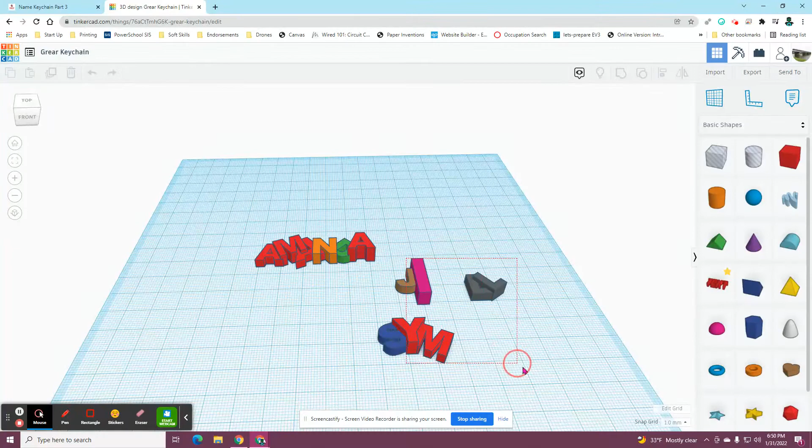Let's go make it. So we go back to our keychain. We're going to click Tinker This again. And I need to get rid of all of this. So this is all the extra from part 2. You don't need to see that anymore. So for part 3, here's my name. So I need my first cylinder. And according to this, it needs to be 8 millimeters square and 4 millimeters tall.

So 8 millimeters square. The easiest way, let me drag that all the way. The easiest way I find to do this is to click on the white box in the corner or the black dot, the black box. It's your choice. And then you go click on the number. And then, because it's highlighted in blue, I can just straight type. If I hit backspace, I might accidentally delete my cylinder, which is bad.

So I'll just type 8 and then hit enter. And then I'm going to go click this other 20, and I'm just going to type 8 and enter. So I really pressed 2 keys, 8 and enter, on both of them. And then it says 4 millimeters tall. So I'm going to go over here to my cylinder, and I want the height. So this is the Z-axis.

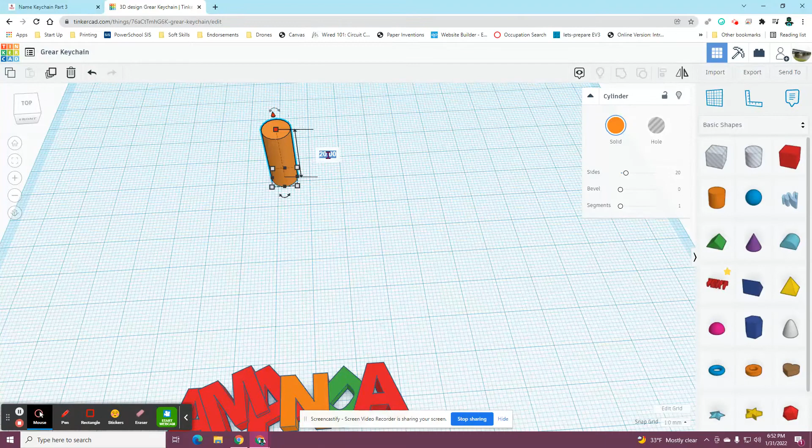And I'm going to click that white box at the top. And then over here on the 20, I clicked it once, so it's now blue. And then I'm going to hit 4, enter. So it is now 4 millimeters tall. So that's my first cylinder. The second cylinder I need to get is going to be 5 millimeters square and 6 millimeters tall.

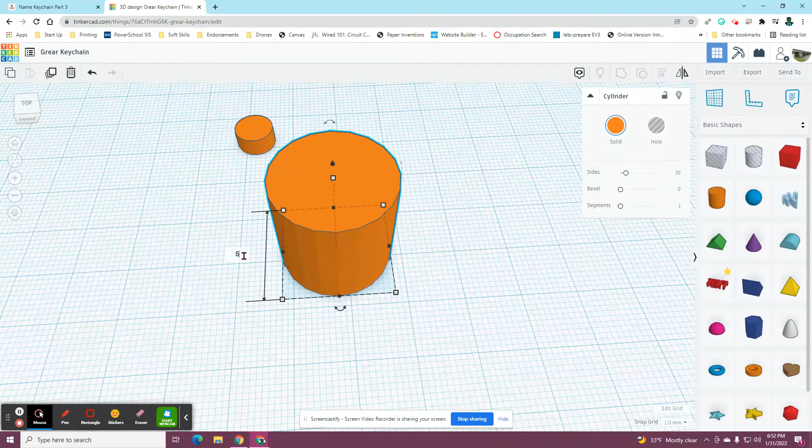So I'm going to go get another one. And this time, I forget already, 5 millimeters square. So I'm going to go ahead and click, this time I'll click on the black dots. So this one I need to be 5. So 5, enter. And then I'm going to go click on this one to get that number, 5. So they're the same. They have to be the same. If they're not the same, it's not going to be perfectly round. It'll be an oval.

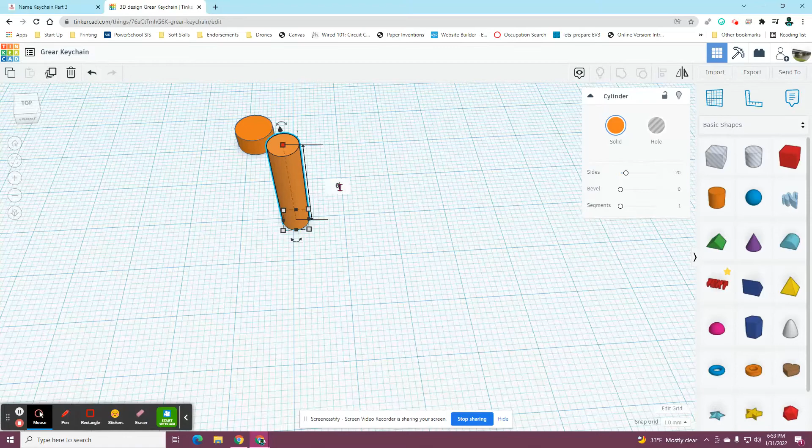And then the height is 6 millimeters tall. So I'm going to click up here, and this one needs to be 6. Okay? Now my directions say I need to make this one into a hole. So I'm going to go over here to this pop-down box, and I'm going to click hole. So it's now kind of see-through, transparent, but in Tinkercad world, this is a hole. That means this is negative space.

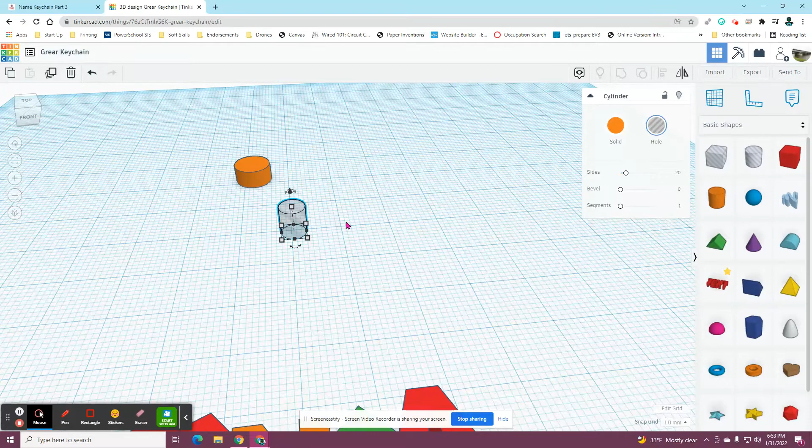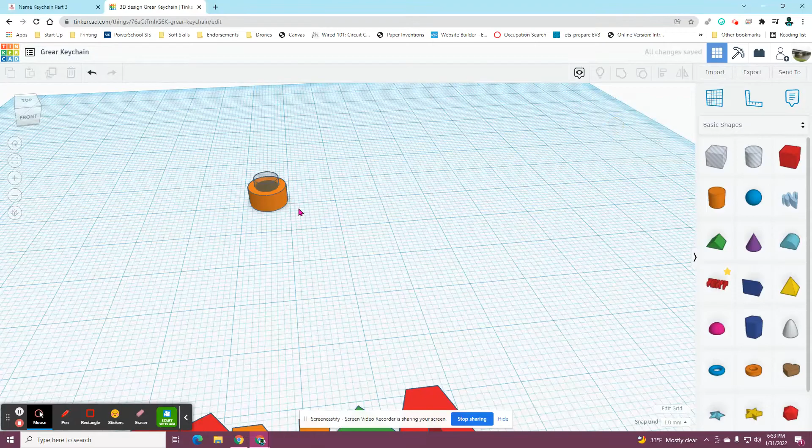So when I group this with something else, it's actually going to subtract away the solid material from the other object. So now I need to select both of these because I need to perfectly center that hole, that second cylinder, inside the first cylinder. So I'm going to click the Align tool, and I'm going to click the center dot here, the center dot there, and you need to make sure this dot here is selected so that it's not floating around. Let me show you.

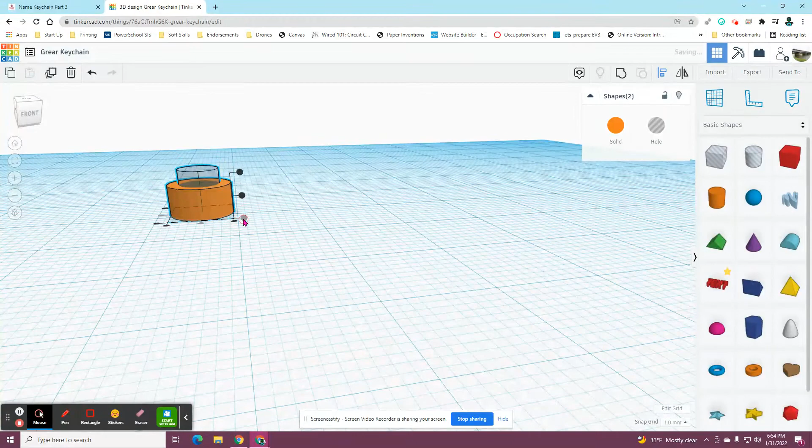If you have accidentally at some point in time clicked that cone, and you go to your Align, why are you doing that? Okay, you go to your Align tool, there we go. We want this dot here to be selected. So this dot should be grayed out, this middle dot should be grayed out, and this middle dot should be grayed out. And with this selected, then you're going right over here to group, and I know I can click group because it's activated versus that is not activated.

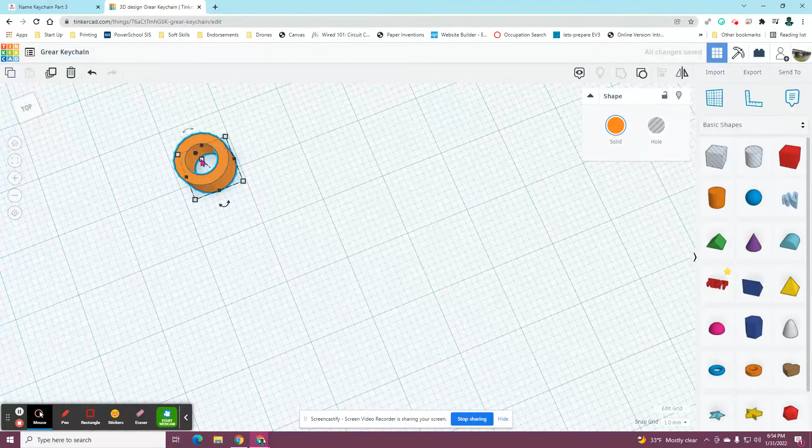So we're going to click group, and once I click group, the magic happens. It's so much fun to watch. It takes away that cylinder. That inner cylinder becomes a hole. And now if you rotate around, you can actually see through this. You should be able to see through this. Please rotate around and make sure you can see through this. And then you get to drag it down with your arrow keys and attach it ideally to your first letter.

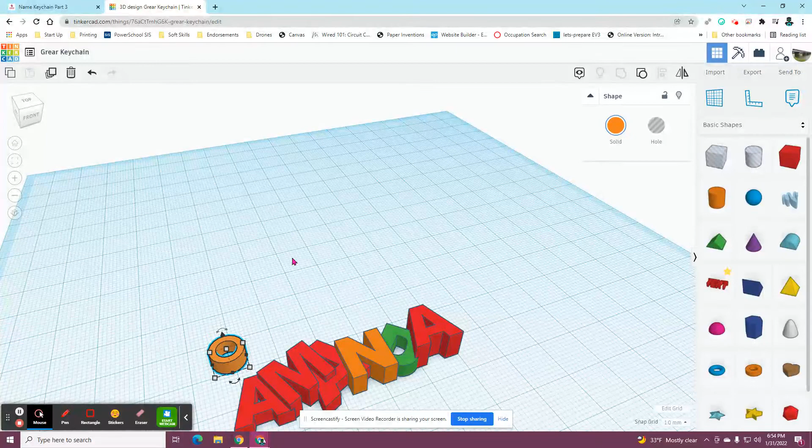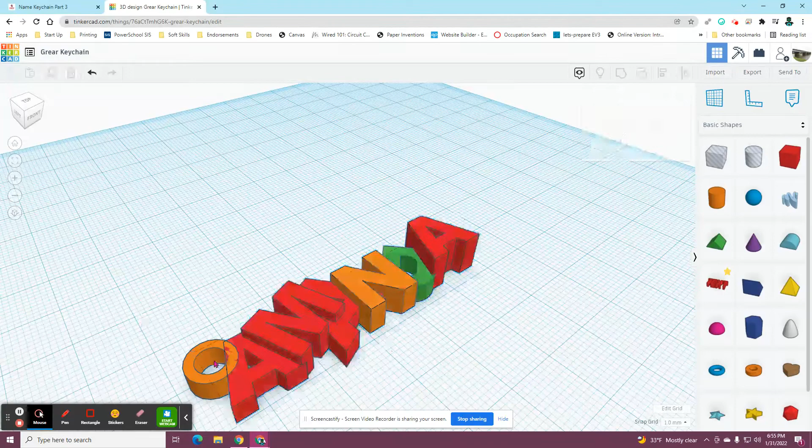So we're going to overlap it into our first letter using the keyboard. So you can see, let me drag this all up for you so you can see better. Right here, my loop is into my letter A. That's perfectly fine. You don't want it to go in that much because that is going to block the center one. We are dealing with super small sizes here. That will block it. That's perfectly fine. That's passable. This is not enough.

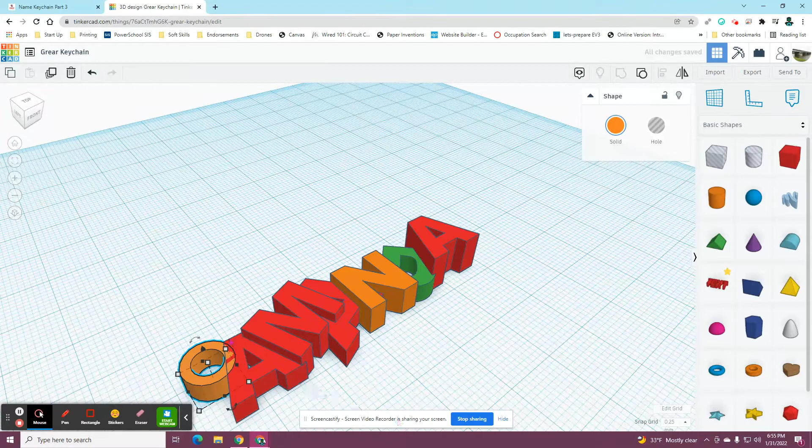It's not even attached. Another little trick on Tinkercad is over here on the corner, it says snap grid. You can change this number, and this changes how much your objects move when you press that arrow key. So I want it to move a little bit less. So you can see when I press that arrow key, it didn't jump as much, and that works just fine. And then once you have that where it needs to go, you're going to click and drag your box around everything, and then you're going to click group. And now your keychain has become one solid object.

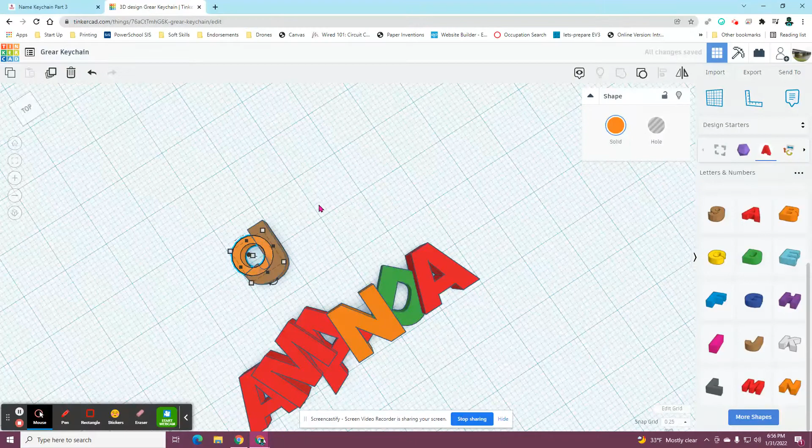And that's all you need to do for part 3. But I'm going to show some tricks for some people that have unique letters in their name, like a J or an S. So let's look at a J. If you have a J for the first letter of your name, what would be really awesome is if you put your keyring loop so that it's nestled into the curve of your J, so it's really attached. The same if you have an S. It'd work really cool if you have it attached in 2 places instead of just like this. This tends to sometimes snap off, but if you have it hooked in there, it makes things a little bit stronger.

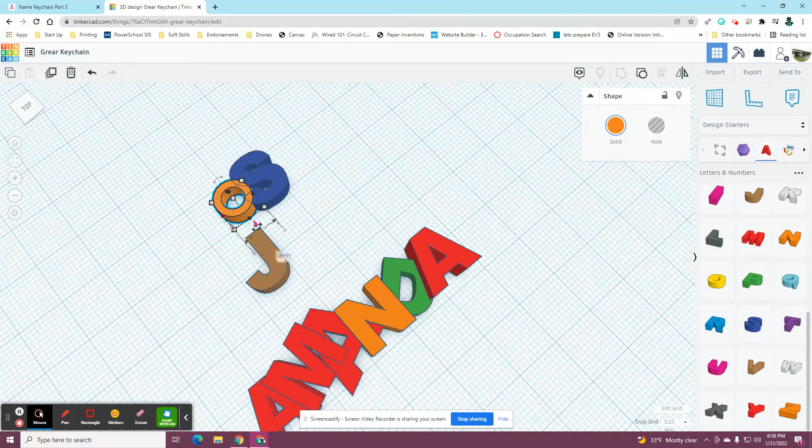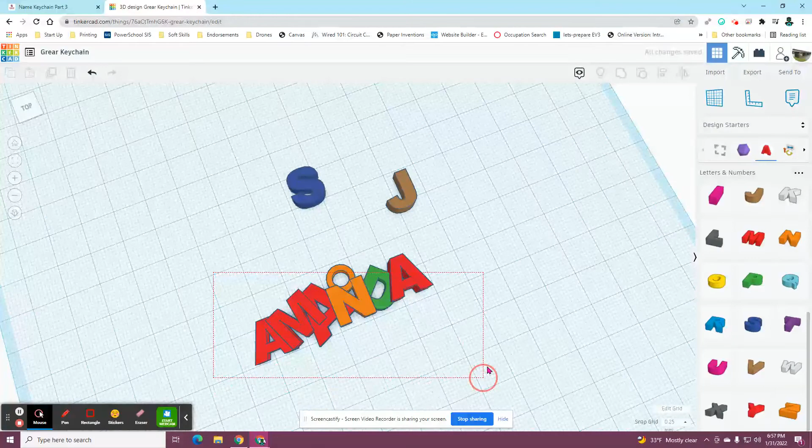But you get to be creative. Be creative in where you put it. And if you really wanted to, I'd let you slide if you want to put yours like here. Like I want to put mine attached, undo. I just changed that. If I want it to be attached closer into the center of my M, maybe I want my keychain loop to hang from the middle. You can do that. It's just whatever you want done. Once it's done, you need to make sure you have grouped this all together so it's now treated as one object. So that's all you need to do for part 3.